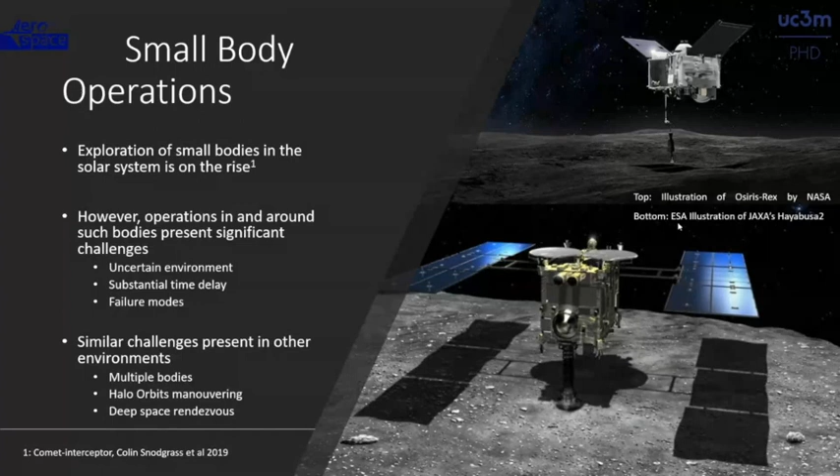There are also similar challenges in other environments, such as multi-bodies, hence halo orbit maneuvering, and similarly in deep space rendezvous, where you want to rendezvous with 2 autonomous spacecraft, but they are too far away to do this from ground control.

But of course, when you arrive there, you will have to do the mapping to figure out the most important things: the gases around it, because of the drag they can cause, and also the gravitational potential, in order to do a successful landing. This is the arrival at target phase, and for the successful missions so far, this phase has lasted 1 to 2 years of just orbiting and mapping the surface where you want to land, but also gaining enough information about the system and environment to calculate a descent trajectory.

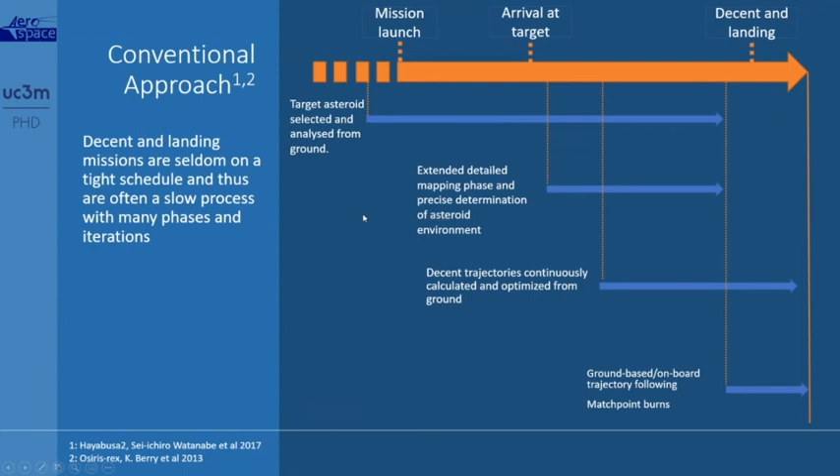Importantly, these are the 2 things that I'm going to look at the most. I should have included low power as well, because that's also quite significant.

But the principle of it is that nowadays, the way this is done is that you do an optimization procedure on the ground, where you have all the information about the system, then you calculate your trajectory, and then you usually do a partial ground-based control method where you directly relay the control signals to the satellite or lander from Earth,

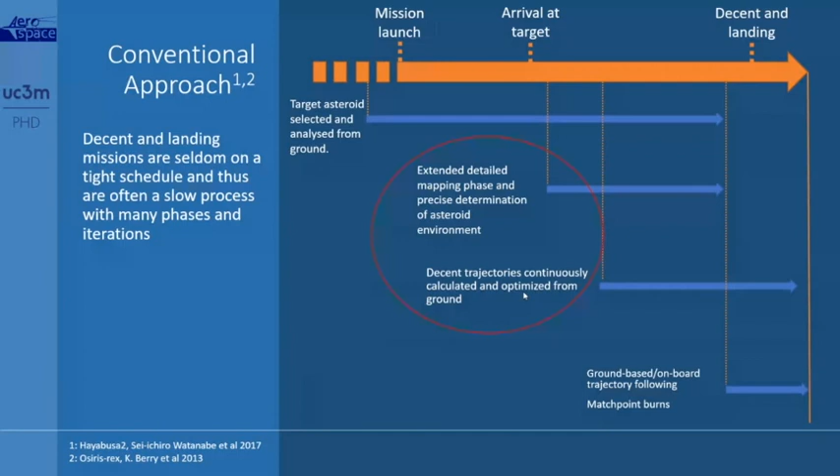whereas the lander, in Hayabusa's case, did the onboard horizontal plane maneuvering, whereas the vertical plane maneuvering, basically the touchdown part of it, was directly controlled from ground control with, if I remember correctly, a 40-minute delay of the signal, which is quite significant.

So, moving a little bit back again, why do we want autonomy in space missions? From what I just said, one of the key advantages is the increased turnaround time and the simplified mission design. Because an autonomous system must be able to handle very many scenarios, it will simplify mission design.

And since it has to be robust, you will also be able to increase your turnaround time because you don't have to do individual analysis of every single thing that you encounter, because a fully autonomous system should be able to tackle these kinds of things. And this requires, first and foremost, robust guidance and control laws. And embedded in that sentence, you have the independence from ground-based control.

So our landers should be able to get into orbit and successfully land on the surface of the planet or asteroid without any input from ground. Similarly, in the other scenarios, in halo orbits or the rendezvous case, they should be able to perform the task without any input from ground-based control.

So the possible methods available for the guidance and trajectory part, which is the most challenging part, are the usual convex optimization, which is the common way to do it. Either convex or nonlinear optimization are the procedures used on the ground for calculating the optimal descent trajectories. But recently we have also seen machine learning or reinforcement learning as a potential contender for these kinds of

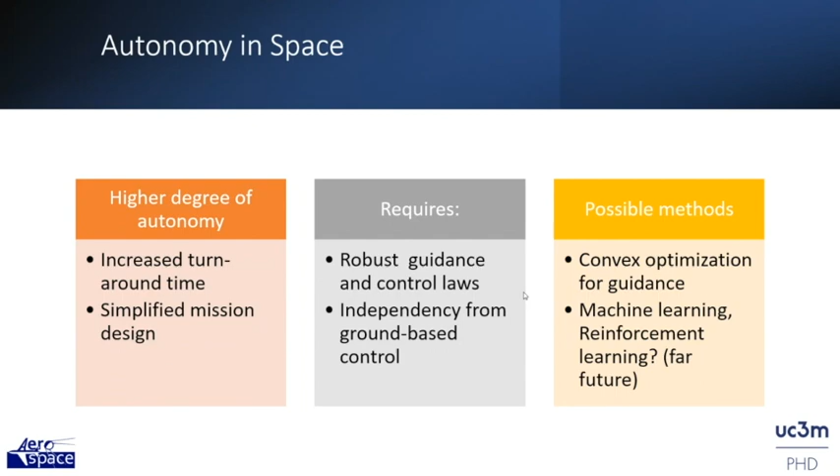algorithms. But significantly, for an autonomous system, these methods must be able to run online on the satellite itself. So shipping off a lander with, say, a machine learning or reinforcement learning algorithm is high risk, since you cannot precisely determine the outcomes. You can only say, to some degree, that it will have a certain success rate, but you cannot have any mathematical guarantees for its performance. So these are some key factors, which I'm going to be discussing later.

And for autonomy, I would say you need the GNC to be able to run on space hardware. You need to have guaranteed performance. You need to be able to guarantee certain constraint satisfaction. And you need the system to be able to adapt to scenario changes or parameter changes, also if something fails on the system.

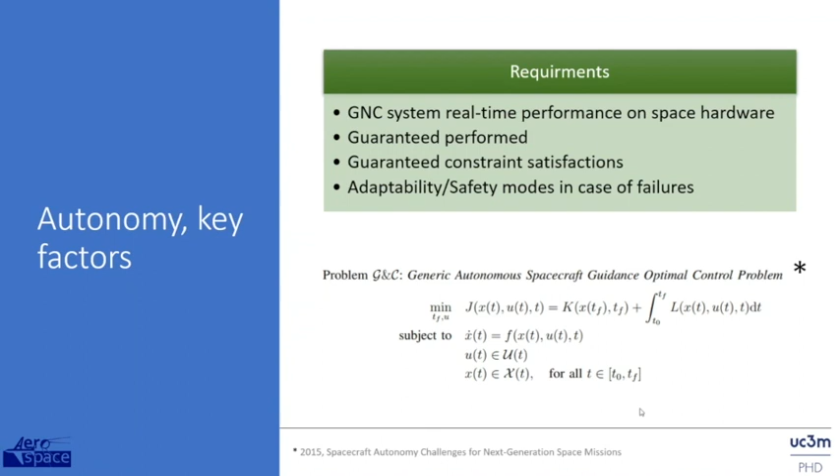In a generic fashion, you have this optimization problem on the lower part of the screen. Solving this successfully on board the lander or spacecraft is basically how you get autonomy. So the desired goal of my thesis would then be to solve this kind of optimization problem using methods that are able to run on space-proven hardware.

And you should be reminded that space hardware in deep space has to be significantly radiation protected, so it is often quite weak. As a reference, the Perseverance rover landed with a control computer from the year 2000, similar to the one in the Apple iMac. So they are quite slow.

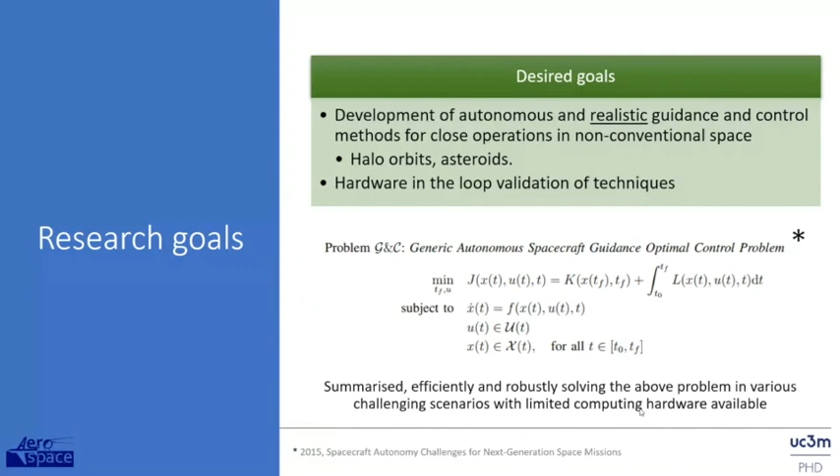So the way this problem is usually solved is that you do convexifications and approximations to get a problem that not only gives you a global solution, but also a solution in finite time. From these convexifications, you usually get a convex program, but there are different orders of these programs. Importantly, the lower the order, the faster the solution, but the accuracy or optimality of the solution becomes worse and worse.

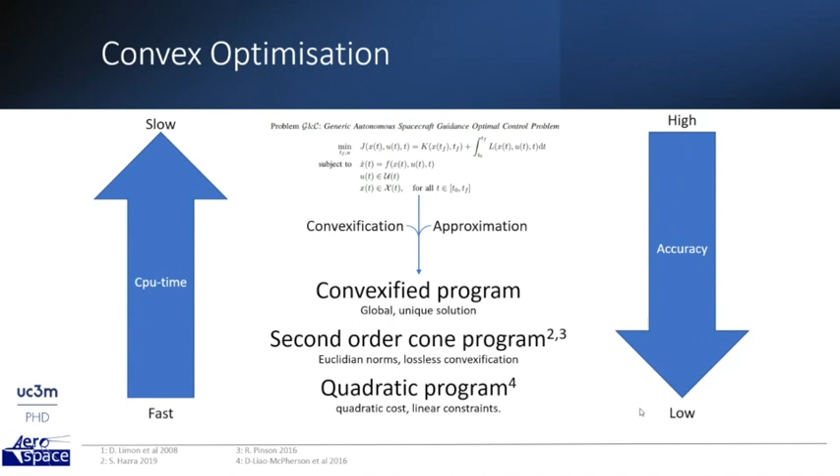So basically, what I've been looking at is: what if you actually use the worst case scenario of this method, which is the constrained linear optimization problem, also known as a quadratic program? The general shape is like this, only with the cost function being quadratic. The advantage is that this is the simplest program to solve, and it's usually used in model predictive control because it's so fast to solve iteratively.

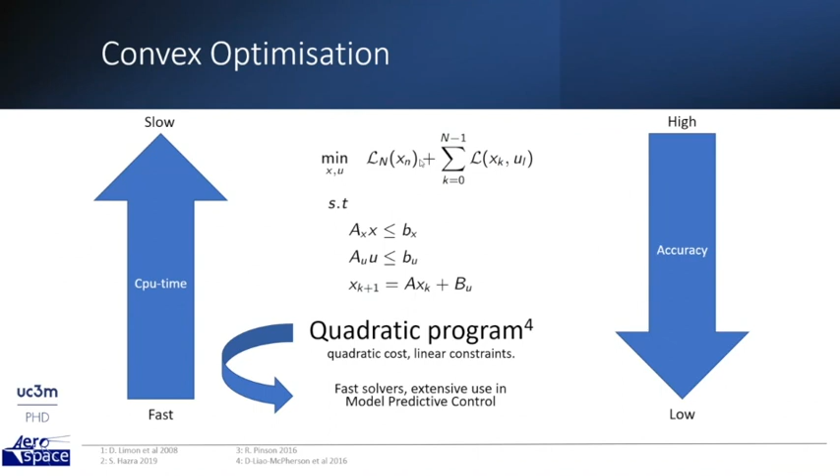I can just briefly mention model predictive control, if you don't know that: you solve this problem that is here at each time step on the spacecraft with the latest measurements. So basically, you generate a trajectory as often as you can, and then you use the thruster configuration generated from the solution of this optimization problem, and you apply this, but you only apply the first in the sequence, because when you iterate one step ahead, you do this calculation anew and you get a new optimal solution, which takes into consideration the new measurements that have occurred.

But the problem with this is that these kinds of systems need to be robust. Model predictive control has some inherent robustness just because you basically optimize at every time step. So if there are some prediction errors or discrepancies in your model and so forth, these will get captured by your new measurements, and you will calculate a new optimal trajectory. However, in the face of bigger uncertainties, and because we want to bound the uncertainties, one common method of doing this is either minimax optimal control or similar quadratic optimal control, worst case scenario basically.

But another method that has gained popularity recently is the tube-based method. This involves using a virtual system, as is the one you see on the right here. You pretend that this is your real system, which is just a linear system that can be solved fast, a representation of the true system where all the uncertainties, and in this case also non-linearities, are captured in this uncertain vector, the omega. What you do is use the optimal inputs generated from solving the virtual system. But using only this, you will not get the performance you want, because it lacks all the uncertainty and non-linearities captured in the omega.

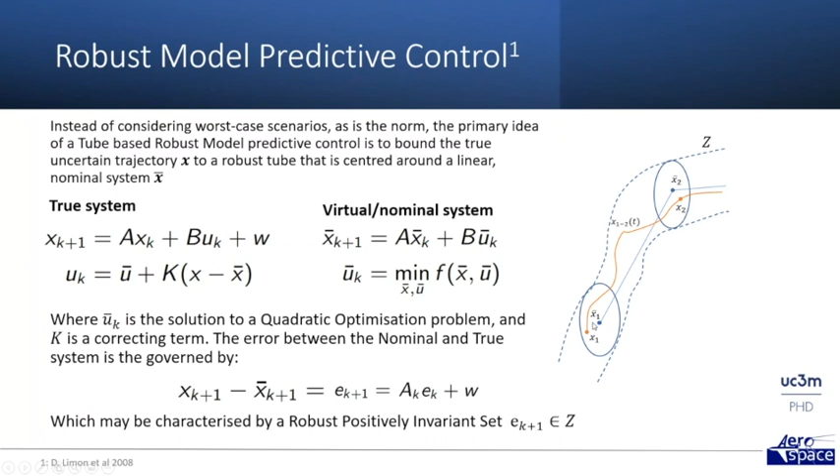So you need to do some compensation, which is this matrix here, and it compensates for the error. As you can see on the right-hand side, this basically causes the actual true system to follow a tube centered around the virtual system. You can consider the dotted line here, the tubes, and the virtual system is discrete. With these kinds of methods, you can more or less guarantee that your trajectory will lie within a robust positively invariant set centered around your virtual system. The positively invariant set is defined by these two matrices here, the AK and your uncertainty. The AK is a design matrix; we basically design how fast you want it to converge. With this, you have guaranteed convergence to the virtual system.

The advantage of this is that you can guarantee constraint satisfaction as long as you design your parameters correctly. And more importantly, this is a simple quadratic optimization problem, so it can be solved on board in real time, and very fast solvers already exist for this. There's a high degree of autonomy, which I will show later, where you can basically do replanning on board should something happen. And safety modes are also readily applied to these kinds of methods.

However, nothing comes free after all. The issue is that you get a linear performance in a non-linear environment, since you are trying to follow a linear system. And as with all optimization problems, the further ahead you want to look with the prediction horizon, the more expensive this scheme gets, and also with more dimensions. In the one I'm presenting now, I'm just using the movements, so only the 3 degrees of freedom. But if you want to couple it with attitude control as well, suddenly you get a lot more degrees of freedom, and the solution becomes slower.

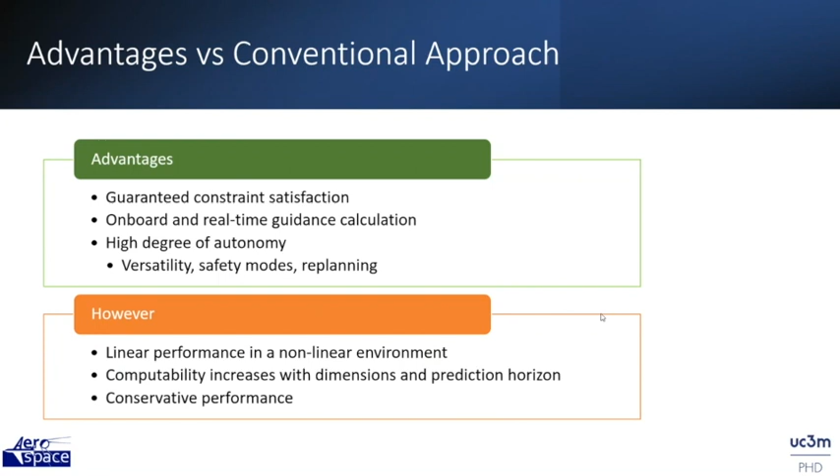But also you get conservative performance, which again comes back to the linear model that you are using. So I'm just going to showcase a quick scenario for a case study. What we want to do is land in the center of this asteroid Eros, which is like a banana shape. So basically you want to land in the middle of the bend of the banana without having any specifically good models of the asteroid or of the gravitational potential field or anything.

As I said, the models that we are using are linear ones, so they only capture this to a certain degree. For this scenario, I've used a linear regression of a couple of sample points within this domain that has been designed here. As you can notice on the image, this domain that I've created goes slightly within the asteroid, but due to the construction of this positively invariant set, it is guaranteed to never collide into the asteroid. And here are some results.

One of the key things with this method is, as you can see on the right here, the initial conditions of the lander in the scenario are randomized with both random velocity and random position, I think 60 different starting conditions here, and all of them successfully manage to land in the exact same spot every single time.

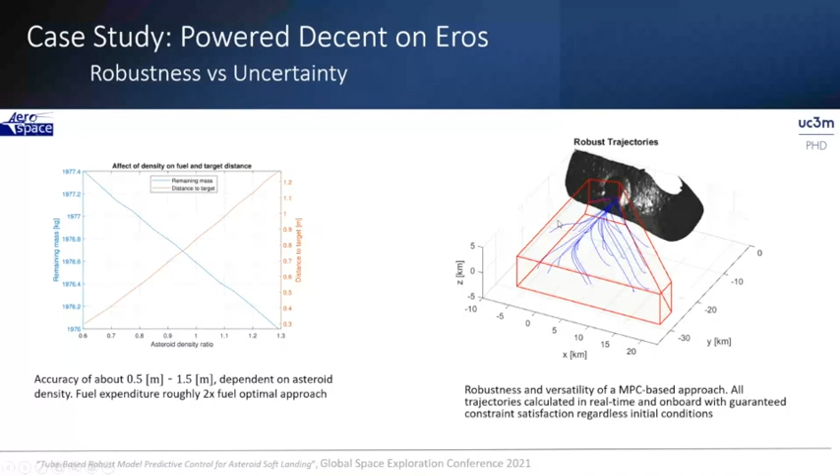However, due to the way that we are following a linear model, and that we have to compensate for the errors from following a linear model, this method currently uses a lot of fuel, roughly twice the amount compared to a fuel optimal approach. But it also lands significantly faster, because you basically thrust directly to the surface as fast as you can without crashing. As you can see on the outer one here, it comes close to the containing box, but it never exits or crosses it.

There are also, of course, some challenges with these methods. Since it contains both guidance and control in one simple box, this is susceptible to tuning issues, and as you saw, there are steady state deviations in the accuracy, so it is possible to use novel or conventional approaches to reduce this even further and get an even higher degree of accuracy. And a couple of other notes here, but I'm running out of time.

What I'm working on currently is, of course, to improve the underlying models, because as I mentioned, I just use a linear model based on regression analysis. If you improve your model, you will drastically improve your performance, because the better the model represents the dynamics, the more realistic the virtual environment will be. The other part is I want to investigate using this in other environments.

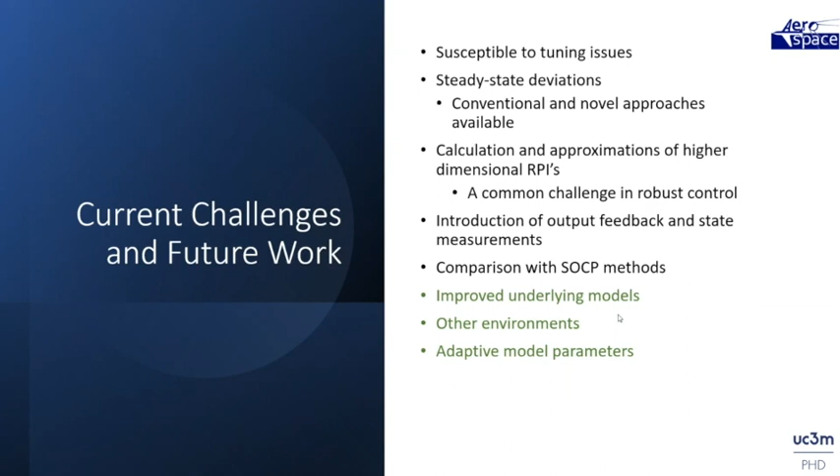And finally, to be able to use adaptive model parameters, so basically combining this tube robust model predictive control with adaptive model predictive control to enhance your model as you go downwards. The advantage is that adaptive controllers also have guarantees if you excite the signal enough. But this is currently ongoing research.